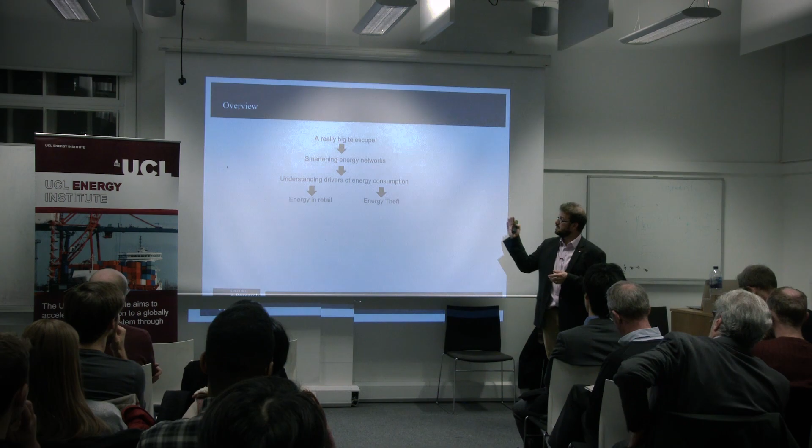Gaining insights on domestic and non-domestic energy utilisation through informatics, or how I link radio telescopes with energy theft. My aim today is to tell a bit of a story, to move from how we started doing work looking at radio telescopes, how you organise information for those, and how we then link that into smart energy networks, particularly at the distribution level. As part of that, how that linked into understanding drivers of energy consumption through analytics, and then looking at energy in a particular sector, in this case retail, but also energy theft. So, telescopes to theft, T to T as it were.

The radio telescope I'm going to talk about very briefly is the Square Kilometre Array, which some of you may have heard about. It's going to be the world's largest science experiment, covering thousands of kilometres, and is going to generate exabytes of data. The really important part of it is that it's going to be run by the radio astronomy community, and they have a few fairly fundamental requirements.

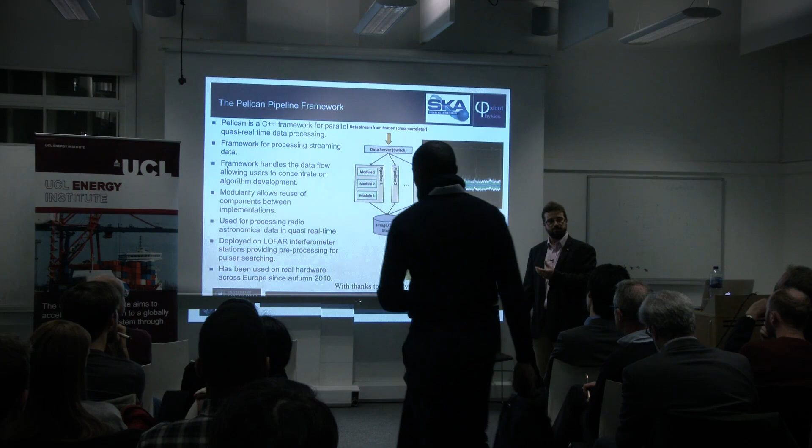From their point of view, what they want to be able to do is plug algorithms and applications that they develop into a common framework which interacts with the radio telescope, because they're not IT people, they're astronomers. They want a common framework which their applications can interact with, that controls the connection with data, that runs in the most appropriate manner on the computational resources as efficiently as possible.

As part of that, we developed this thing called the Pelican Pipeline. This was for the design study, around how we were going to get access to, or prove that we'd be able to build, a £600 million telescope and it would actually do what it was supposed to do.

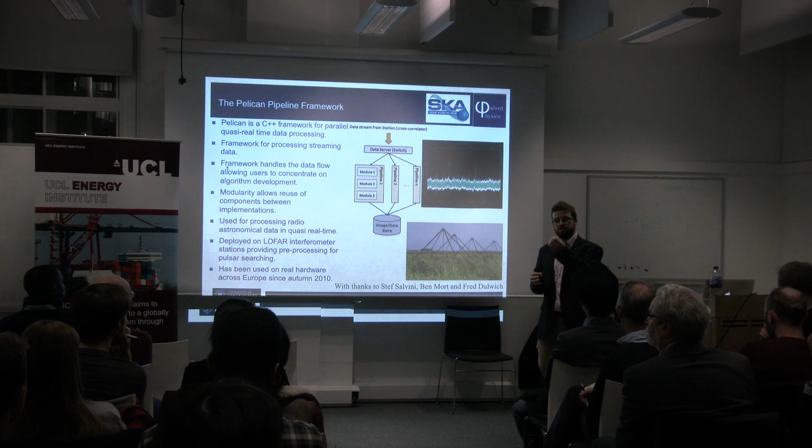The point of the e-research centre that Bob mentioned earlier, that I'm part of, is actually a particularly fundamental one. Our point is that we work with the research community, we build a tool or service, we look at the application design model of whatever it is that we're working with, and then we step back and say which other communities actually have a problem that is shaped like this.

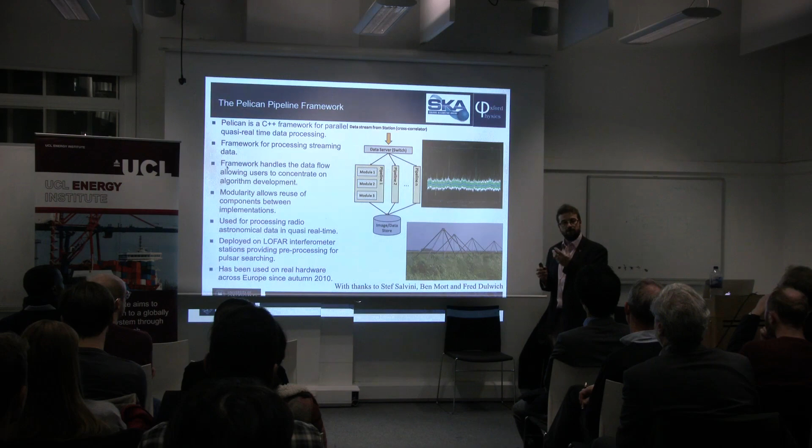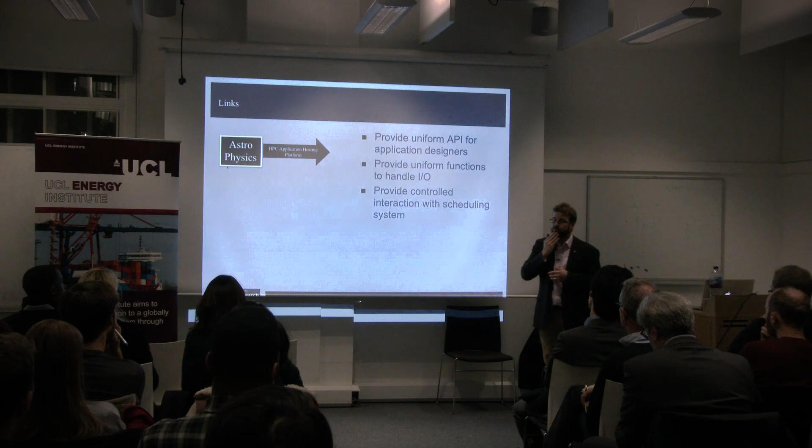So which community, if you were to ask them, has a problem very similar to this, where they want to be able to plug applications into a known framework and not have to worry about fundamental interactions with the underlying IT system. The really interesting one we came up with almost immediately was that we go from astrophysics, which wants uniform APIs for application designers, uniform functions for handling fundamental I/O, and wants to provide controlled interactions with the scheduling system and the compute platform.

What we found was that the distribution network operators are also getting to this point. For those of you in this room who understand this just as much as I do, the distribution network is the last not really smart part of the network. And though some of the DNOs would be very upset when you say their network isn't smart, it's certainly not instrumented and not analysed to anywhere near the level that the transmission network is.

The transmission network has a lot of applications. If you go to the National Grid Control Centre, they're very proud to show you all of the different services they're able to show, and understand exactly what's happening in the transmission network.

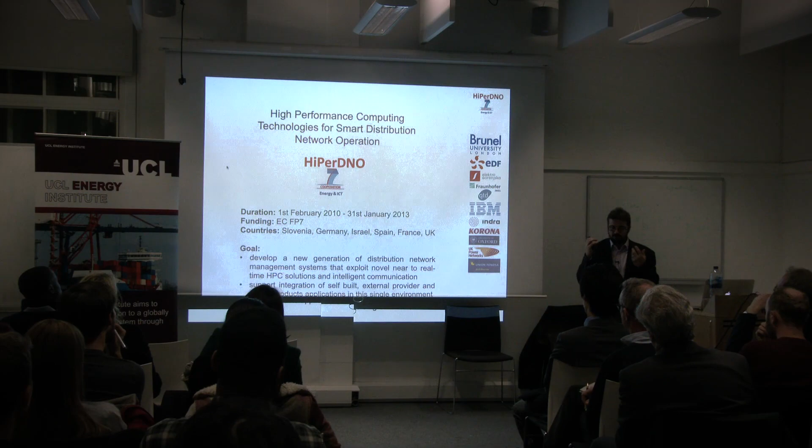As part of a European Community Framework 7 project, High Performance Computing Technologies for Smart Distribution Network Operation, we took the framework we designed for astrophysics towards a couple of distribution network operators from Europe, so EDF and Gas Natural Fenosa. The point here was that the network we're going to need within distribution is going to have to support plugging in of tools and services that have been designed elsewhere, maybe commercial products.

So they're not going to be something the DNO is able to look into themselves, they're going to be black box solutions, but they're going to want to run them all in a coherent way, connecting to the distribution management system that they actually operate. So of course, the big motivation is that here is our traditional system.

It's a very sort of generator to consumer type system, and we want to get to smart grids where everyone is connected and information is flowing. But of course, what we don't want to do is turn off the lights on the way, because that's always embarrassing and my mum would be really upset. From that point of view, we've got to smarten the systems in a way that is gradual and able to ensure we keep everything running.

So what we want to be able to do is take current distribution management and add smart technology to it without any interruption of supply, shall we say.

So what we came up with, utilising almost the technology from the astrophysics experiment, was the idea of application wrapping in a computation as a service environment. From that point of view, it was about the fact that different applications have different computational requirements. They have different precedence levels. They need to be run by different communities with different levels of urgency, shall we say.

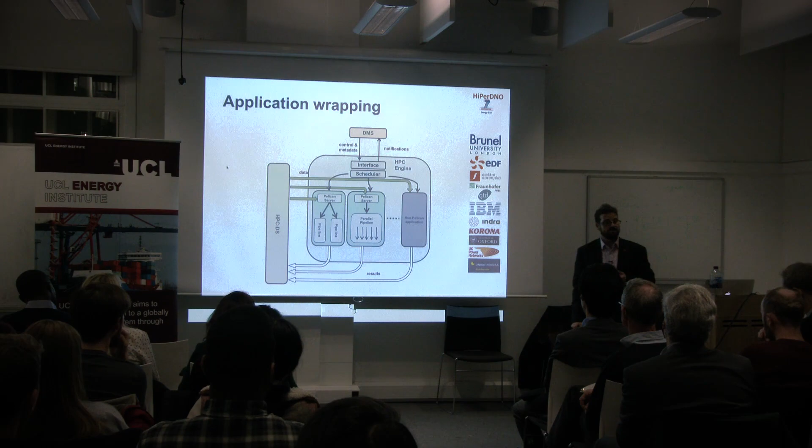And from that point of view, that needs to be controlled by the distribution network operator, by the guy in the control room. He doesn't need to know everything about this, but what he does need to know is that when there is an incident in the network and he requests a system state estimation and a restoration algorithm to run, it's going to run right there and then, because customer minutes lost means money as far as the distribution network operator is concerned.

So from their point of view, smarter distribution was really around four different key services. It was around a constantly available distribution system state estimation using available information that was within the system. It was about the idea of service restoration algorithms being able to run and preempt other services within the computational system. It was about condition monitoring and analytics of the network service.

So could you actually tell the condition of various network infrastructure using the various different streams of information that you had? And of course, voltage control, particularly in areas of networks with high amounts of distributed generation. The idea was essentially that all of these would operate as individual black box services within the high performance compute engine and storage operated by the distribution management system.

So at that point, it was the idea that we could plug all these in and create a smarter distribution network without turning the lights off, and have the ability to add new and better services as and when they came online.

But the most important part in some ways is about this reuse idea. The energy distribution guys, as part of that, we developed computation as a service. With the condition monitoring, we talked about developing computational services to support data mining and machine learning for condition monitoring.

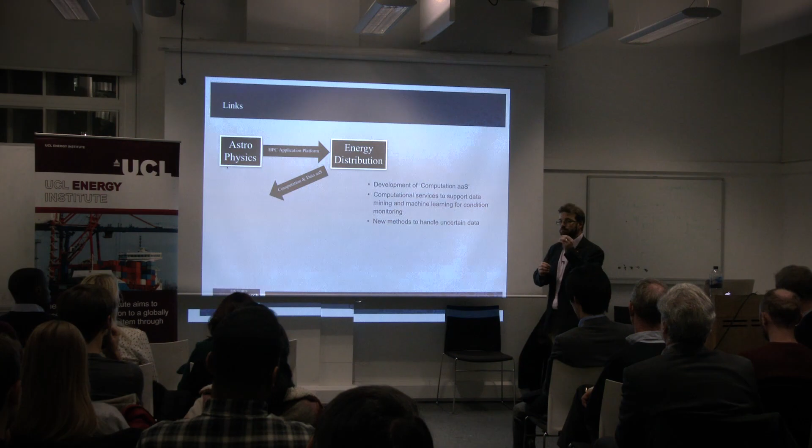Now, from the point of view of the energy network and very large rollouts of IT infrastructure, for example smart meter rollouts, when you're talking about tens of millions, you're not going to be able to guarantee how well every single one is behaving. And from that point of view, you want to be able to do certain types of machine learning and algorithmic services knowing that you can handle the uncertainty in the information that you're going to generate.

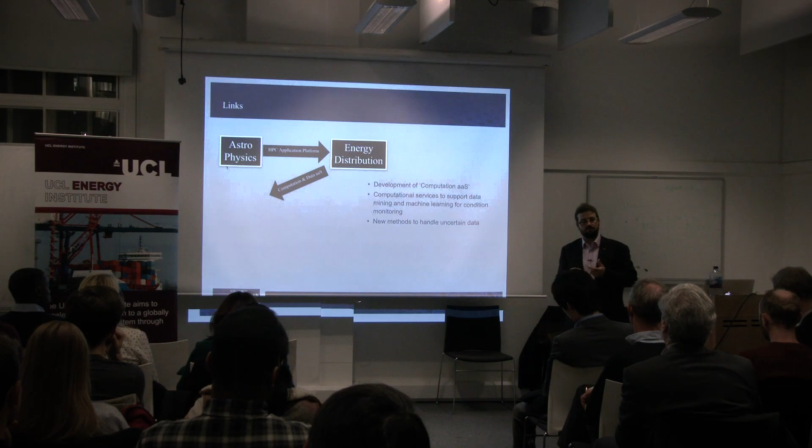So following on from that, we then went into our next activity, which was the Adept Project, which was an EPSRC activity in collaboration with Brunel. This was looking much more at the domestic area. The idea here was three key things.

The first one, looking at tariffs and pricing, is thinking about how consumers are really ready, willing and able to understand dynamic tariffs or complex time of use tariffs.

So who can remember when mobile phones were introduced? Can you remember peak time and off-peak time in your mobile phone? When you then got past simple peak and off-peak, how many different types of peak time were there? Because the really interesting one, at the very height for mobile phones, there were 180 different tariffs, pretty much from Vodafone.

And you can tell immediately what happened there. Everyone ignored it and just used their phone, which is why most people now have a flat tariff. You pay for your phone and that's it.

That's the thing you want to avoid when introducing dynamic pricing and time-of-use pricing within smart metering: confusing people, like my mother, to such an extent that she says 'I don't really care, it's only 20p, so I'm going to ignore putting on the tumble dryer at this time because it doesn't matter to me.' That's going to be a failure of the introduction of these tariffs, and of all the infrastructure we've just spent a lot of money, time and energy, ironically, to introduce smart metering.

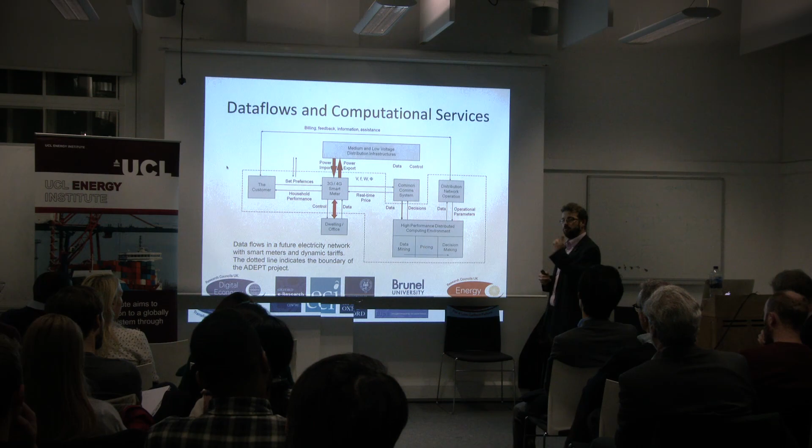And really, can we say to people that if we introduce real-time pricing, you're going to be a winner? Because if you introduce any sort of tariff change and turn around to people saying you're guaranteed to pay 50 pence a day more, they're probably not going to like it and probably not going to want to adopt it. So this was very much about what we could find out from the information.

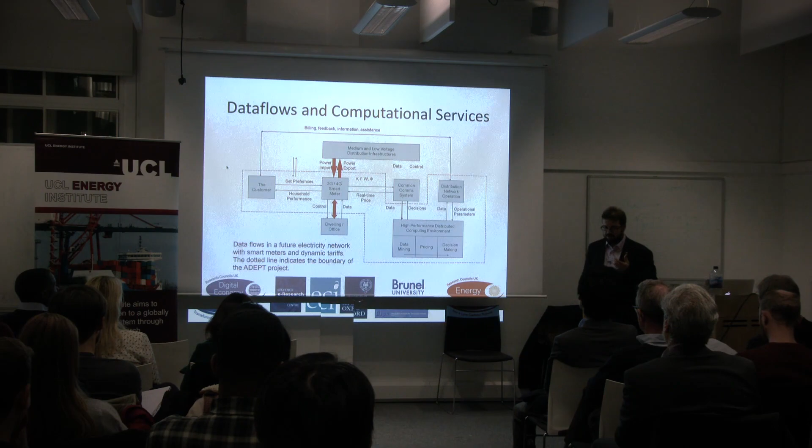From the point of view of data mining, it's around categorizing and classifying costs. We were lucky to have, fairly new at the time, a data set available to us: the DEHEMS project, an EC FP7 activity, which had about 250 properties in the UK and Bulgaria with smart meters installed to provide domestic load information.

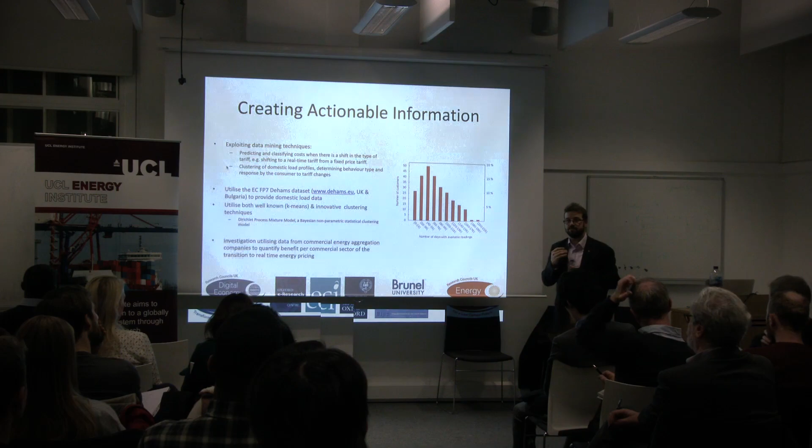On top of this, and this was a real extension of the project, we also managed to get a handle on a load of commercial data from a local energy aggregation company called Opus Energy, who are based just up the road from me in Oxford. From that, it was looking at the idea of how we measure the benefit of switching tariffs. So this was the result of the clustering using DPMM on our domestic or residential data.

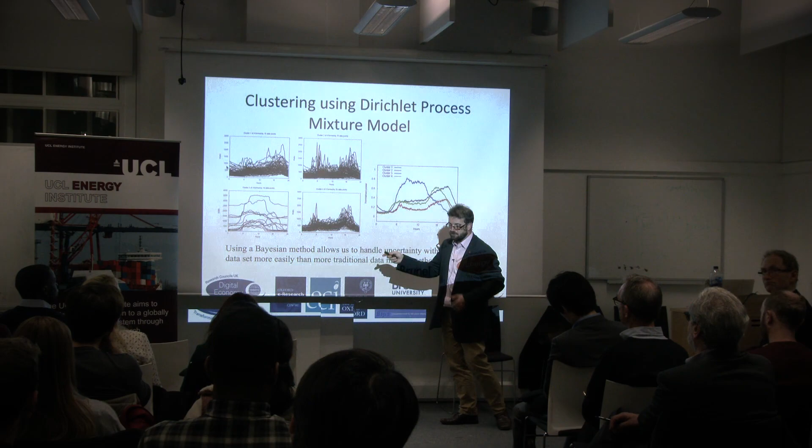And it came out every time consistently with 4 different clusters. They look very sort of raggedy when you look at them just implanted on top of each other. We'll come back to these later because they're really interesting, bearing in mind it's domestic.

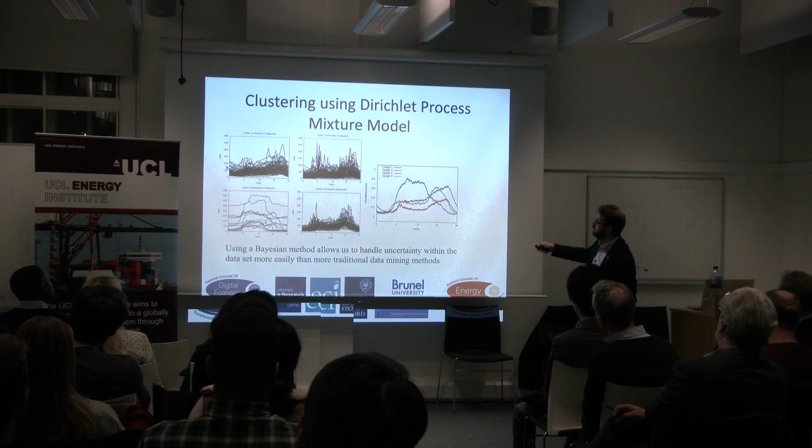But this is the plot of the centroid, the load profile of the centroid for each of the clusters. The interesting part here is you can see very clearly, here's our fairly standard domestic load curve. We've got some users that are pretty large evening customers. We've got these ones that are pretty flat. And then we've got these guys that give a very, very different curve, which now, having operated in a different area, I recognize immediately, and some of you obviously will as well.

But what we were able to say was, okay, the consistent point around this was no matter how much we adjusted the clustering, these clusters came out pretty much every time. We then started to look at what does that actually mean if we were trying to do demand management and things like that? What would that mean for elasticity?

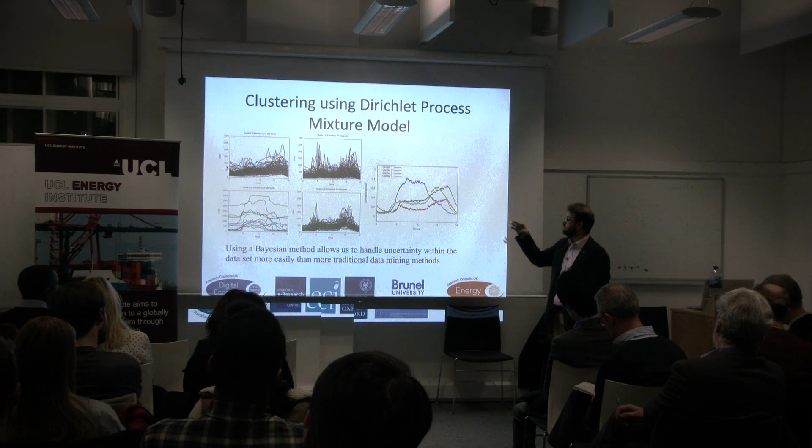That allowed us, through the work of Sarah Darby within the project, to run a couple of focus groups with the different communities to talk about how they would react to some of the points on different tariffs.

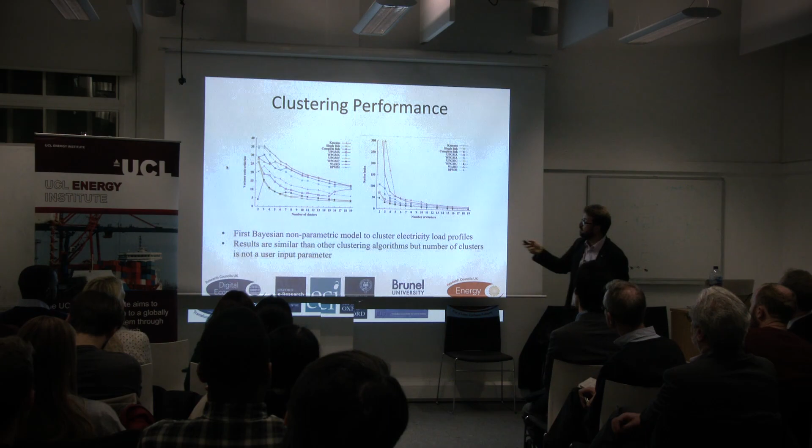From the point of view of performance of the clustering, we basically saw that DPMM, using a couple of fairly standard clustering measures - the variance ratio and the scatter index - works basically almost as well as any of the other standard clustering techniques, right up to a fairly large number of clusters. So we were fairly pleased with that.

So from that point of view, it meant that at the end of the day this was a technique that would have value when attached or utilised with domestic load consumption data, and could be used as input into a number of other activities.

The other thing we looked at, which there's been a lot of discussion about, is that the DEHEMS dataset came with a 6-second resolution, so it was a pretty big dataset. And of course, it's very, very dissimilar to what we're likely to get from any smart meter rollout, or certainly what people are utilising in smart meters on a large scale at the moment.

So what we did was create a number of different sets of data by aggregating our 6-second data. We made 1 minute, 4 minute, 15 minute, 30 minute, 60 minute, and 120 minute resolution sets of data, and then looked at the different sets of measures of cluster performance that you can get for each of those.

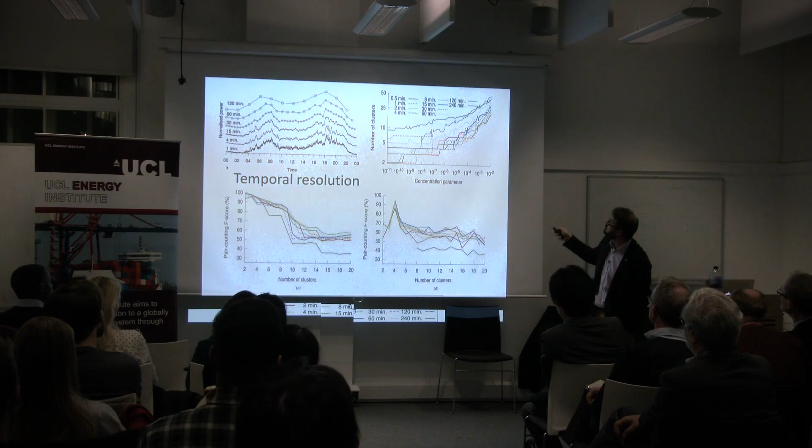The point is that anything over 4-minute resolution becomes very difficult to pick out the same number of clusters in the information you have, compared to what we'd seen previously in the very high resolution data. The clusters start to disaggregate themselves. An important point is that if you're going to use this data for other activities, the resolution of the data will greatly impact your ability to do classification and similar tasks.

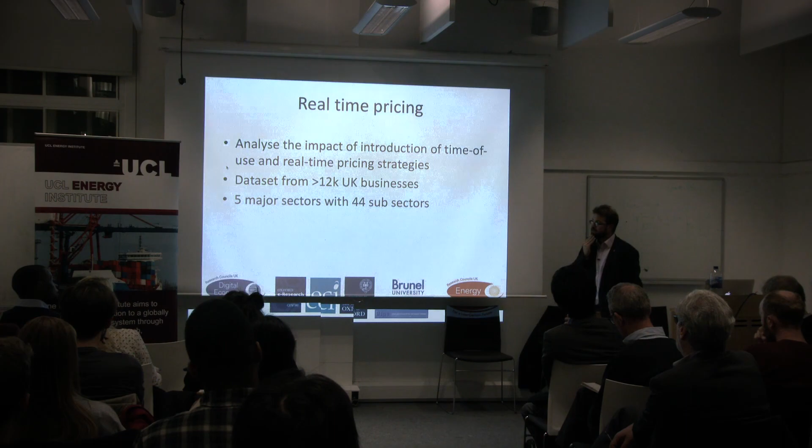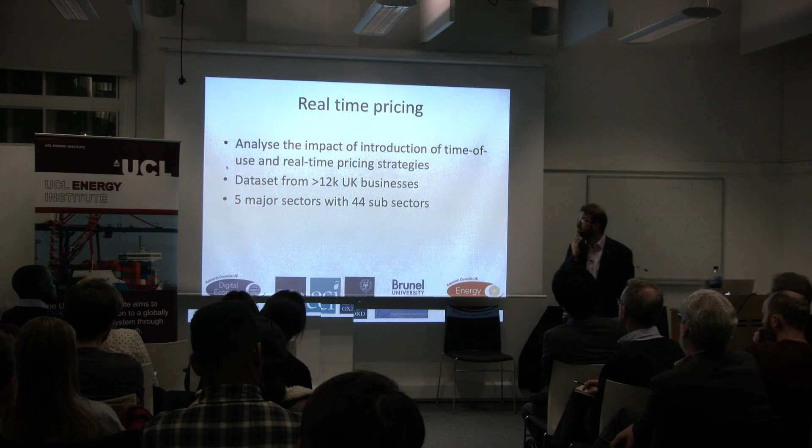The next part is around real-time pricing. Can we actually assess the impact of introducing real-time pricing? We had 12,000 UK businesses' data, and the major thing here was we kept them in their major sectors even though they were subdivided, because if you subdivide into 44 sectors from 12,000 businesses, some sectors end up with very little in them and become very difficult to work with.

These were the tariffs we used: a fixed price tariff, a fairly standard time-of-use tariff from Northern Ireland Electricity, and the real-time tariff, based on the average wholesale price of energy for the same period. We had 5 different major sector areas: entertainment, industrial, retail, social, and other. Many people wanted to investigate the social sector, which was pubs, clubs, and restaurants, but not many wanted to investigate the industrial sectors.

But the point is, if you were to apply each of these profiles to each of these different tariffs - bearing in mind these are the centroids and there are variants within those clusters - who benefits, who wins, and who loses from the migration from one tariff type to another?

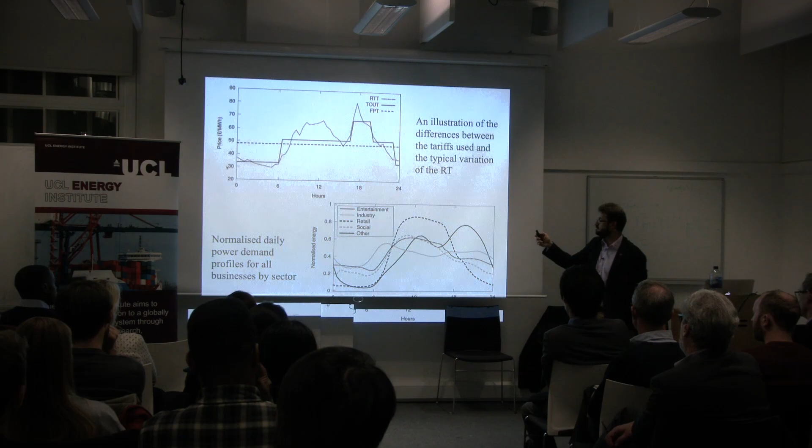As an example, we looked at the transition from fixed price to real-time price. We picked out two different groups: the entertainment sector and the retail sector, and highlighted the centroids of all the winners and losers within those groups. A winner is someone whose bill decreases when they transition from one tariff type to another; the loser is the opposite.

If we look at the black line - the winners have lowered their usage at the centre of the day. The entertainment winners increased their utilization outside of peak times and decreased it during peak. We've seen that those with a much more balanced lunchtime and evening load are actually the losers in this scenario.

The interesting and important point is that in some cases there is very, very little difference. From a price elasticity or behavioral elasticity point of view, if you're able to change your behavior within the entertainment sector - thinking about how you use energy in the morning versus lunchtime - it involves very small numbers of transitions and very small differences.

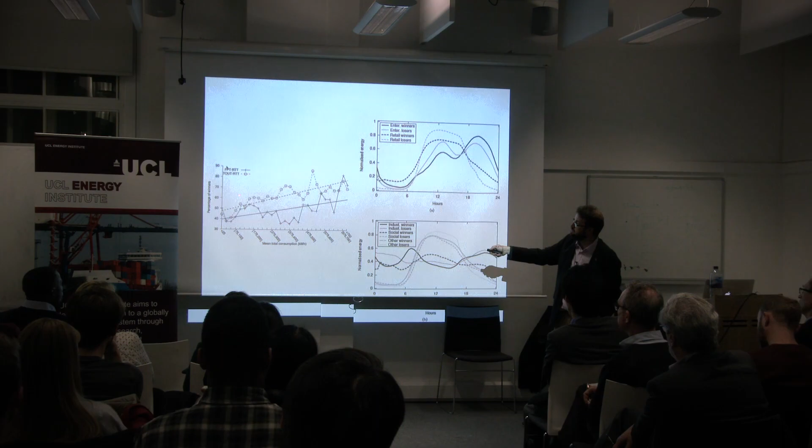As we see on the graph on the left-hand side, the solid line is the transition from fixed price tariff to real-time tariff, and the dotted line with circles is from time-of-use to the real-time tariff.

What we look at here is mean total consumption for the particular business and the percentage of winners averaged over the whole data set. It shows that the larger the consumption, the more winners, essentially. That's an interesting point, across all of the different sectors we're working with, averaged across the whole data set.

But what it actually shows is that there's a lot of spikiness, in terms of the different sectors contributing at different points in this curve. There are some very seriously large users within this area up at this end, mostly coming from the industrial sector.

But the interesting point, and this was something we went back to the colleagues at Opus Energy for, is that having this information allows you to effectively think about a new business. It allows you to say, with my knowledge of what are the ways you want to be shaping your energy consumption to work better when making one of these tariff transitions, I would be able to go to a consuming business they're already working with from aggregation and say, if you were to make this transition from this particular tariff to this particular tariff, then we can show that you're actually going to do better.

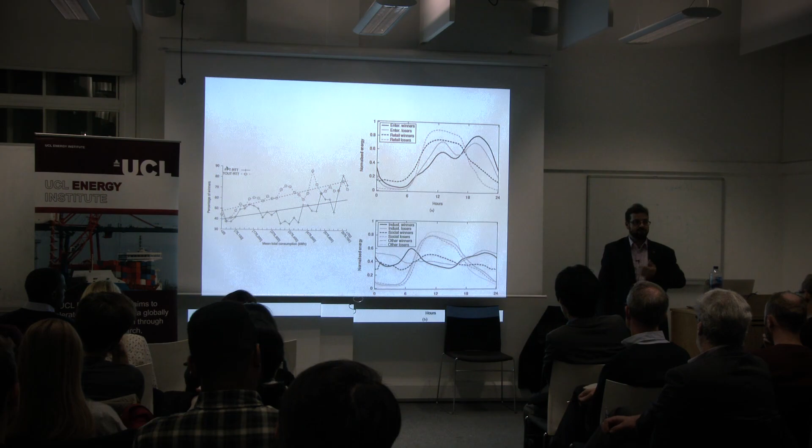So this is around saying that this is a new service that people like energy aggregation companies and retailers can be thinking about, backed up by strong analytics that actually validate this as it's being done.

So from our point of view of our linkage, we had our energy system data there, our machine learning and analytics, where we're gaining understanding of drivers of energy consumption within domestic and commercial customers.

Following on from that was a project with a fantastic title of Working with Infrastructure, Creation of Knowledge, Energy Strategy Development. I have to thank Katy Janda in the Environmental Change Institute for this one. Or WICKED, which was looking at energy utilisation within the retail sector. We did manage to get a very substantial number of commercial partners within this.

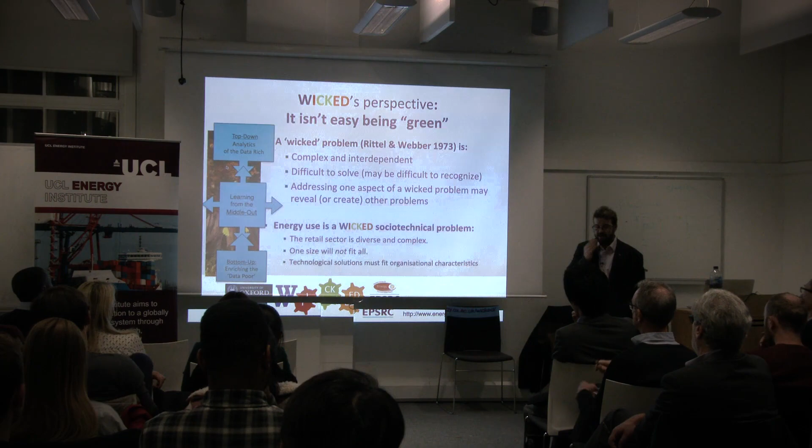Now, WICKED is an idea that energy consumption and energy utilisation is a problem that's multifaceted, interconnected, and one that has no simple solutions. From the community we're working with, we have multiple different communities participating - we have the B&Qs, the John Lewises, right the way down to the small corner shop within everyone's street. They're still retailers, still essentially the same group, and very much dealt with in similar ways by industrial strategies and regulation.

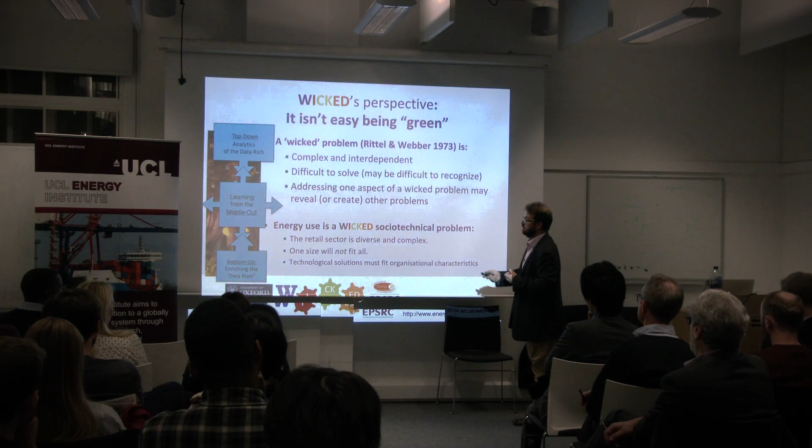So what we were trying to say is there are three different communities. The top down, the analytics of the data rich - these are guys like the B&Q, the Argos, the Sainsbury's, the M&S. All of these guys are working with energy managers. There might be only one energy manager per group, or if they're lucky, more than that. But these guys have access to data, very often on a regular basis. So there's a lot of capacity there for learning from working with them to increase their understanding of their own data.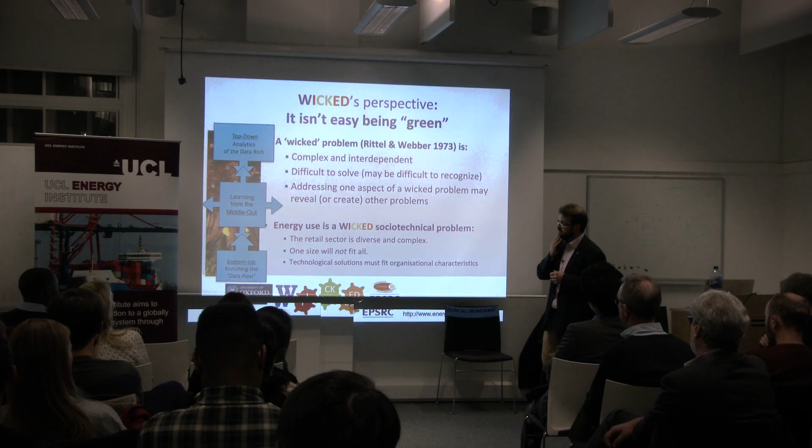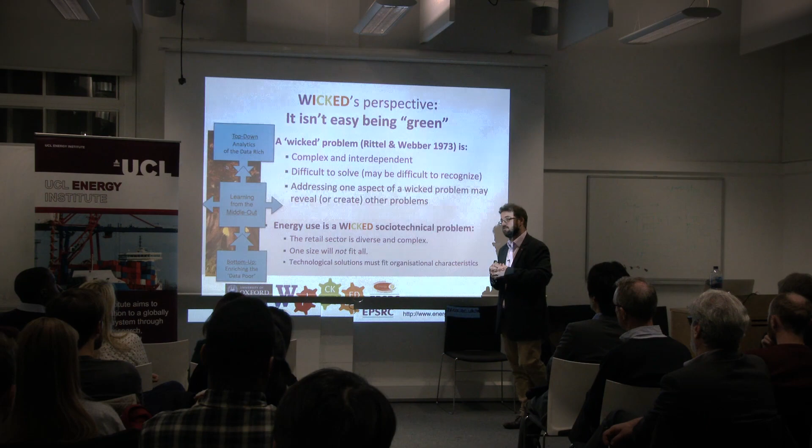Right the way down to the guys at the bottom who have no data, because they're renting their shop from a landlord. They don't have access to the meter. They have no understanding of what energy they're consuming, and no understanding of how their business practice connects with their energy consumption and utilisation.

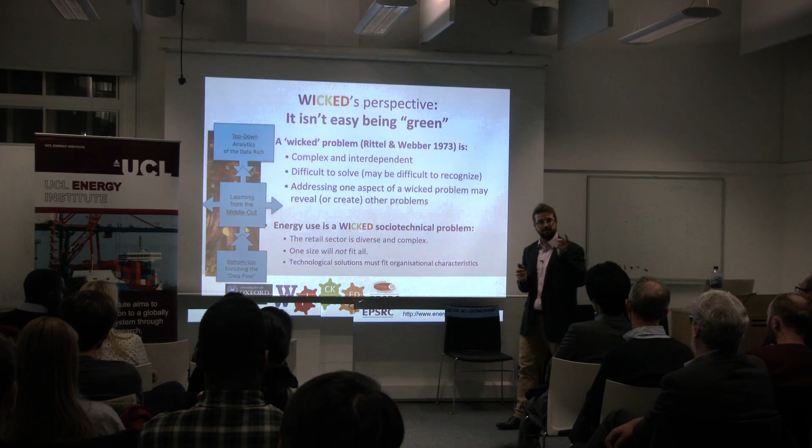That was the group within ECI thinking about how you actually create a smart meter for them that doesn't cost the earth, but is something they can get for under £10. Russ Layberry in ECI has basically built a smart meter you can get for under £10 that you can just hook up to your system. The data rich - these are the guys who really do know what they're doing.

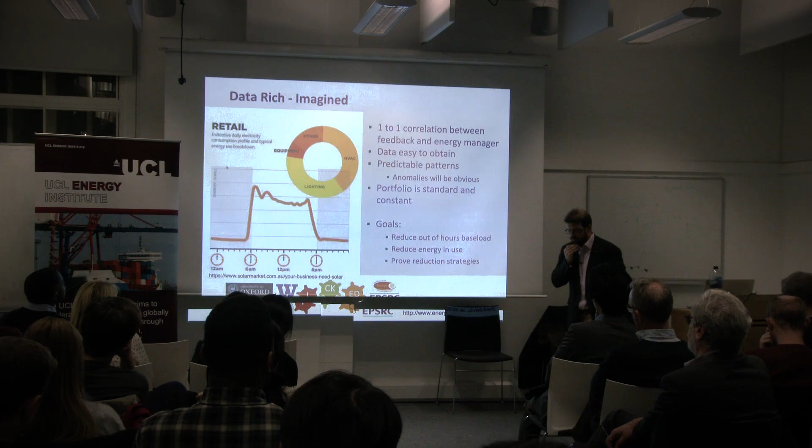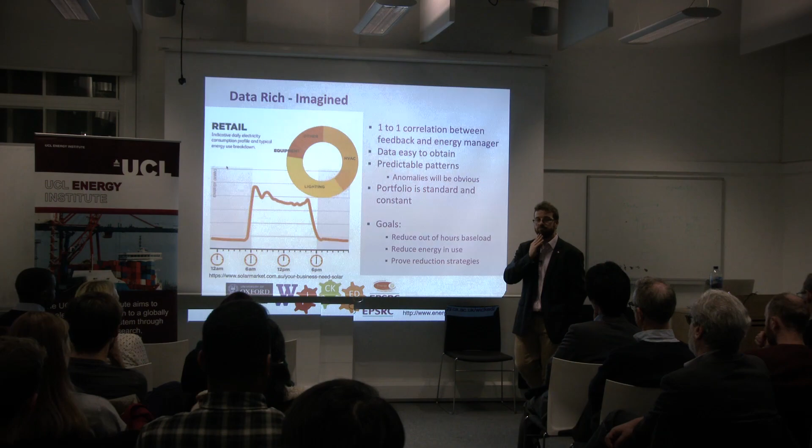They have staff on board engaged in this. But interestingly enough, one of the things we found is these guys are still retailers—people focused on how much product gets out the door. That means return on investment times matter a lot. We found at least one major national chain that requires 100% return on investment on any energy efficiency work within 1 year.

So there was a gentleman, the energy manager in that chain, who felt very under pressure whenever anybody asked whether he'd pay back the money it cost to do X, Y, or Z. A lot of LED lighting went in, and that was sort of the way forward.

One of the things we wanted to look at, with a large electronics retailer, was: from his point of view, what can we get simply from the information he has access to day-to-day? Can we figure out what we can do to help him out?

The interesting thing is he has 30-minute electricity readings, because that's what every smart meter has at the moment, but very little metadata went with it. He had the postcode of the shop, which he could get easily, but very little knowledge within the company of how to get information on the type of building the shop was actually located in.

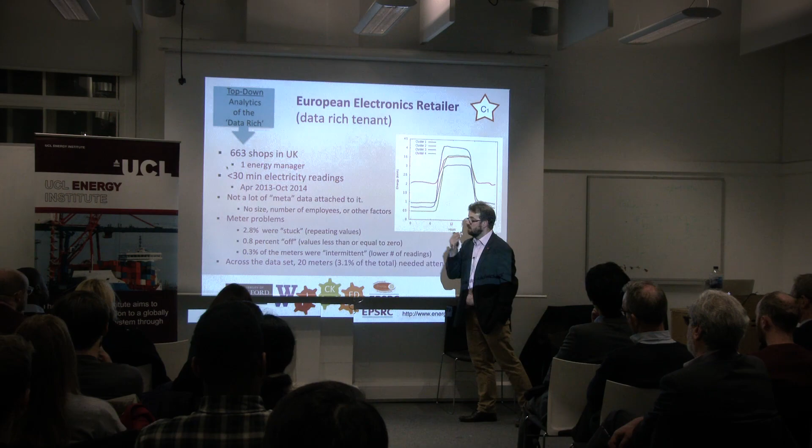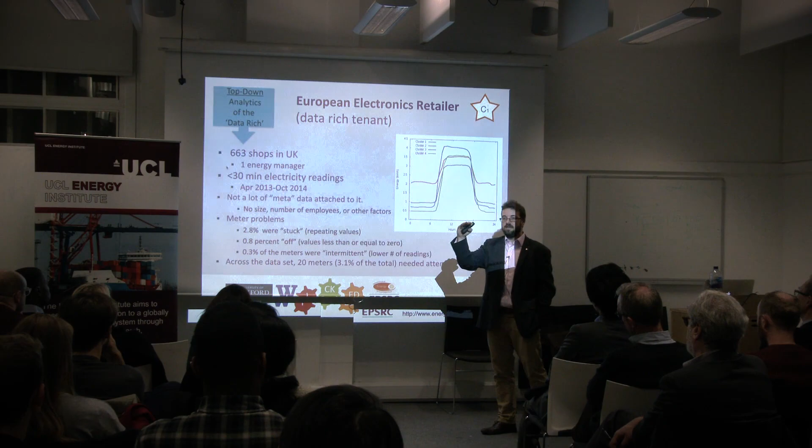One of the things we were able to do almost immediately was identify meter problems. We found about 3% of his meters were broken and just giving constant values. The interesting part is we're not talking about constant maximal or minimal values—we're talking about constant values within a sort of expected range of consumption, which makes it very tricky for any other system to flag unless you're specifically looking for it.

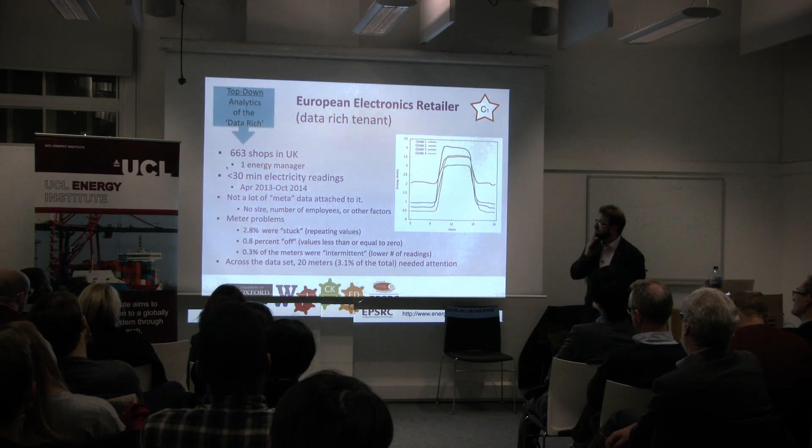We also had about 1%, and 0.3% of meters with intermittent failures—they give good data for a long time, then rubbish for a short period. So there's a non-trivial number of meters that actually needed attention.

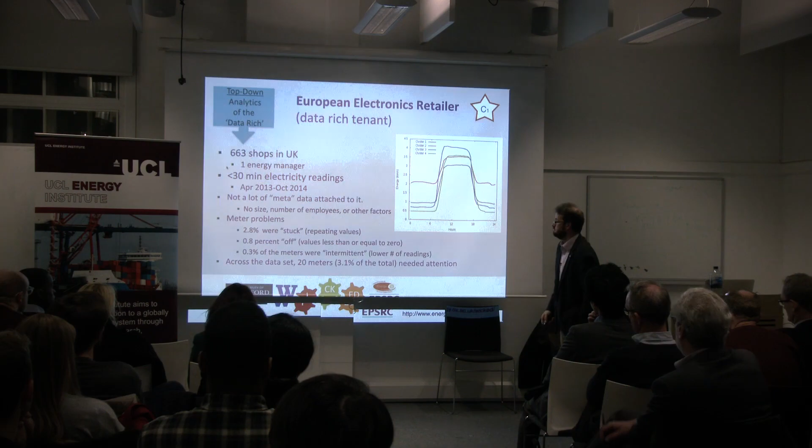That was a value-add as far as he was concerned, because he could go back, in many cases, to the landlords of the premises and say, guys, you own the meters, I want you to sort this out. So that was the first step.

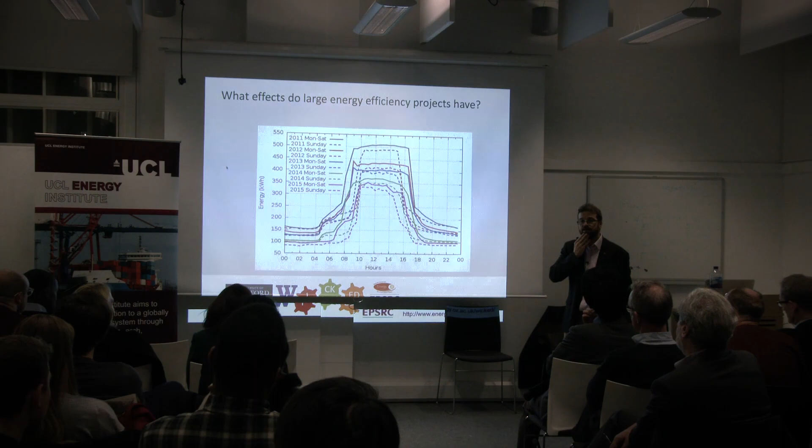The next question was: what sort of effects do large energy efficiency projects have? This was easy to examine with another retailer, looking at the same population of shops to see whether there's a constant decrease and real benefits from the energy efficiency projects they've been working on over the years.

Since they're retailers with store opening hours, the ratio of store open to store closed is quite handy in many cases. Also, where do they sit in terms of total consumption from different store types, in quartiles of consumption, comparing floor area across different types of stores?

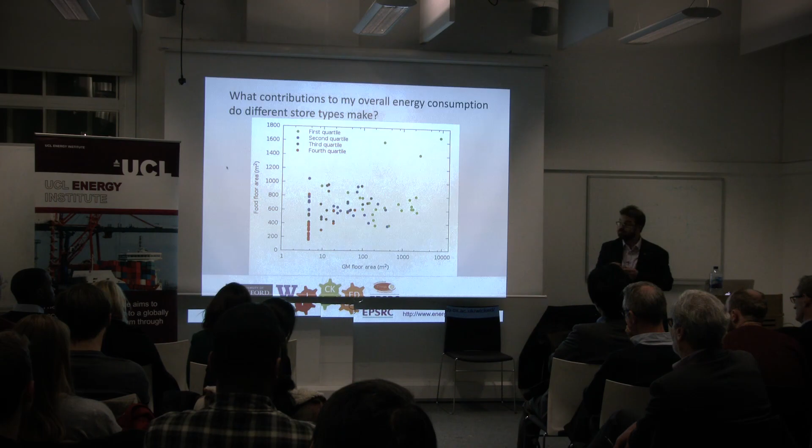But the really interesting part, which the managers were really getting into, was the idea of: where are my best stores? Where are my worst stores? How do I understand where best practice is? Because in some ways many of these stores operate with a level of autonomy, so where do you concentrate investment?

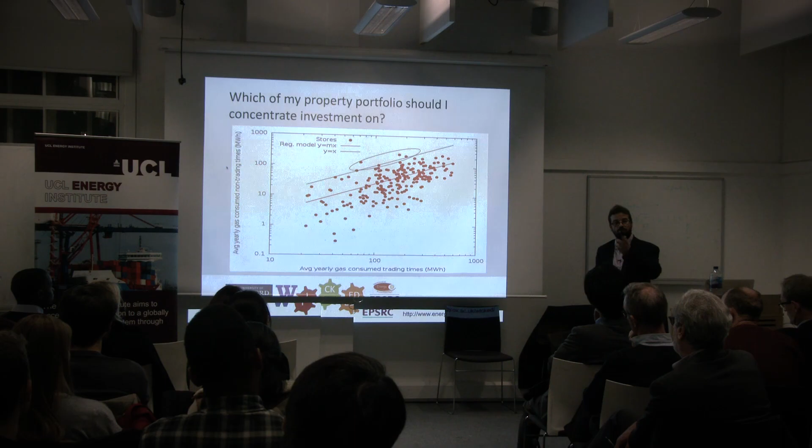So these stores up here are doing very badly. As the group energy manager, I want to go in and say, what's particularly bad about these? Do you have some sort of problem or issue we need to work with your landlord on to really solve?

And of course, where do I want to go and send all the other guys from all the other shops, to go and learn from these guys, because they really know what they're talking about?

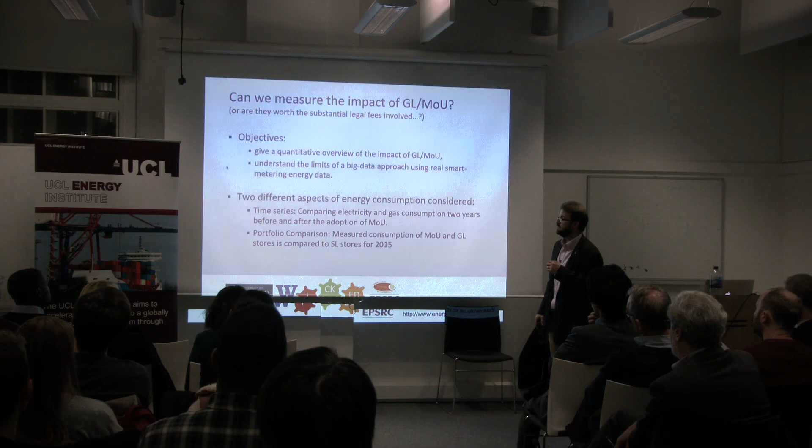The other part of this activity within the project was working with the law department around the idea of environmentally friendly legal instruments—green leases or memorandums of understanding, which establish a partnership between the landlord and tenant. Really what we wanted to say was, were they worth the legal fees it takes to establish them? Because legal fees are vast.

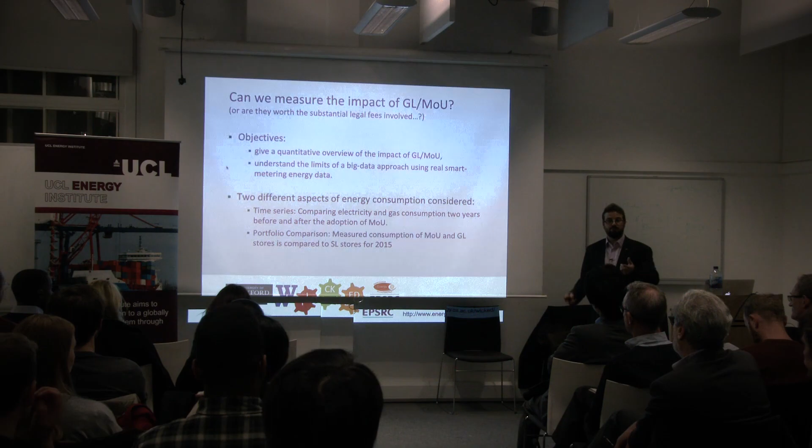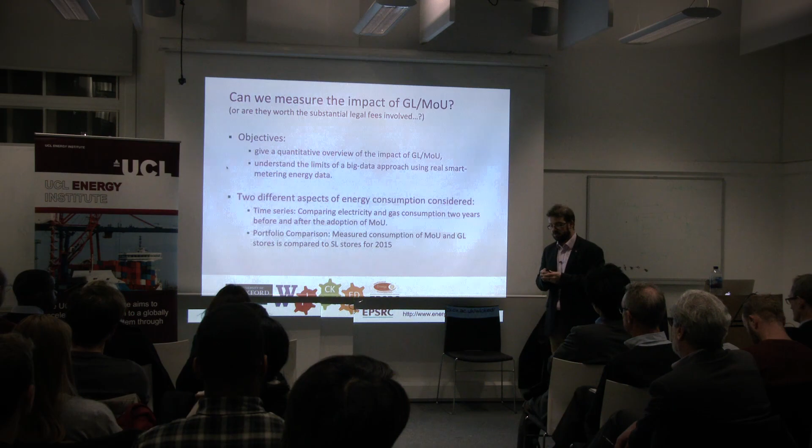From that point of view, we really wanted to look at whether we could see a quantitative benefit to the establishment of these. And I must admit we struggled, for two reasons.

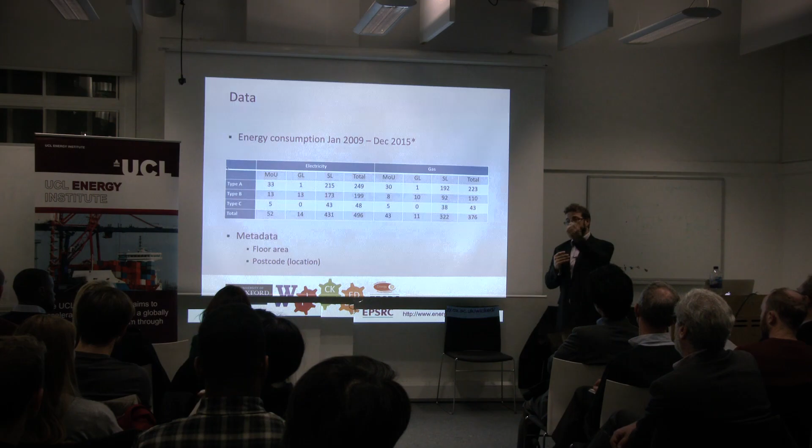The first was that we had energy consumption information, metadata on floor area and postcode, but even the group themselves didn't really know when exactly these particular legal instruments came into force. So what they said was, well, say they're all after March 2013, and we had to deal with that as the date.

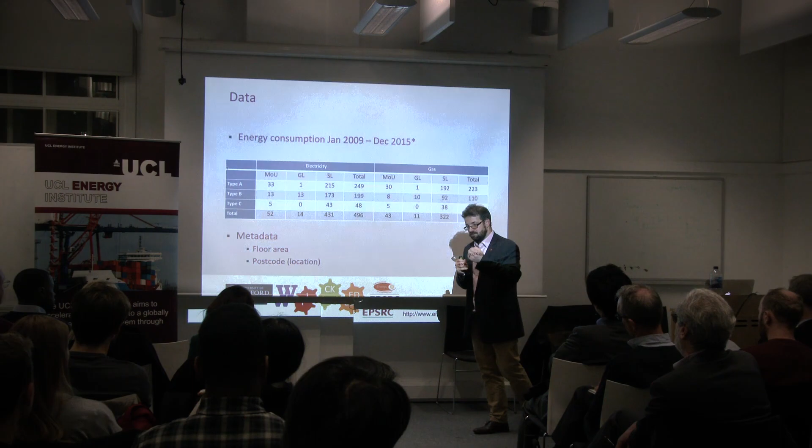Now, the other problem with this is that all these instruments do is say, okay, we will work together. It doesn't mean the day they're signed you're going to rip out the heating system and install a new energy efficient one. It says we've agreed we're going to work together in future in a close and collaborative way.

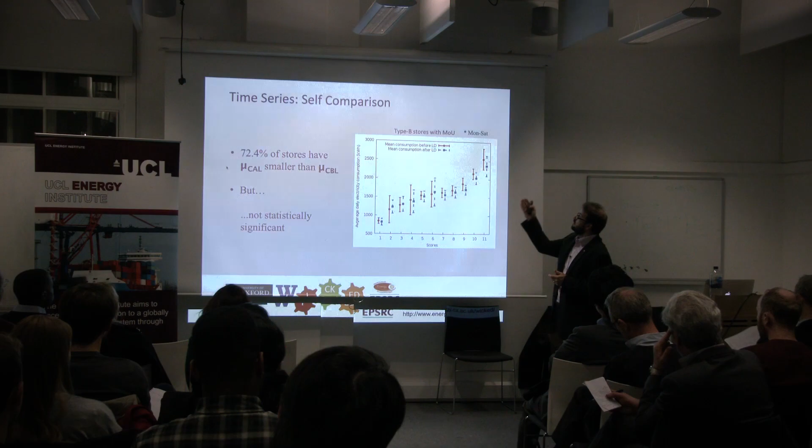So we looked at a bit of self-comparison, looking before and after. You can see there's a significant percentage of stores where consumption after the LI is smaller than consumption before, but unfortunately it's not really statistically significant.

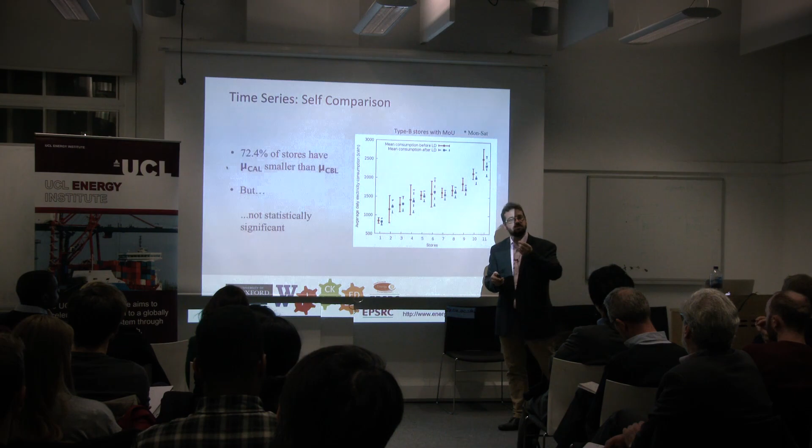But it's there, and one of the things from interacting with the legal teams was that this still came out as important for us to know—that there's something, even if it's not statistically significant, that we can start having conversations with people about.

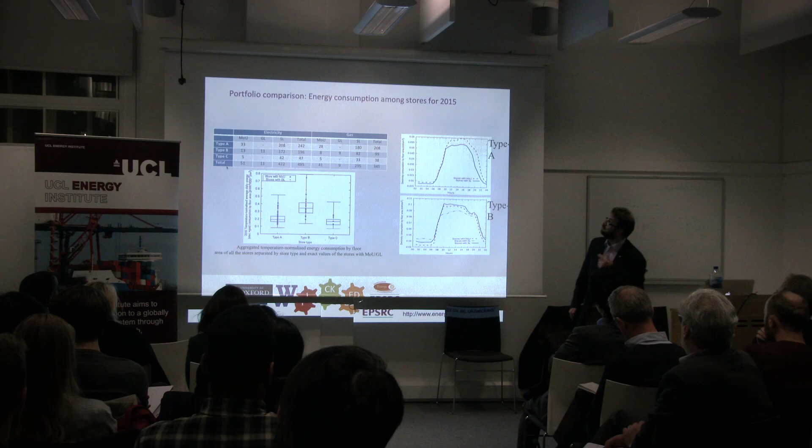What I'm going to do is say, okay, from this point of view, we linked consumption and non-consumption time series providing analytics. We've linked consumption to business process within Wicked. Now, of course, data mining, data mashing—we're going back to these guys here.

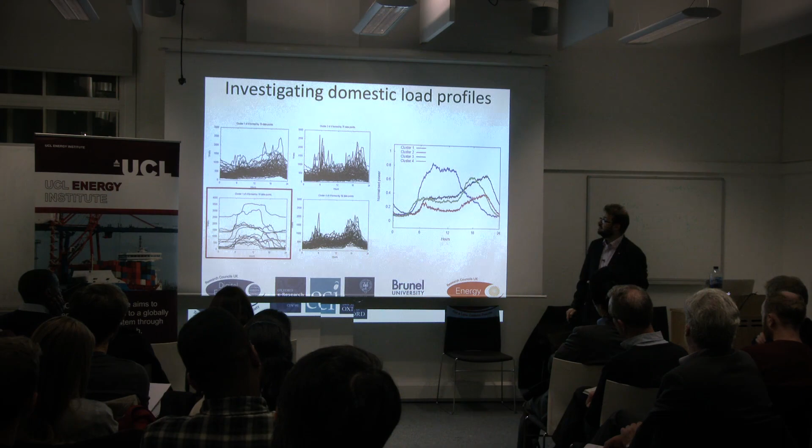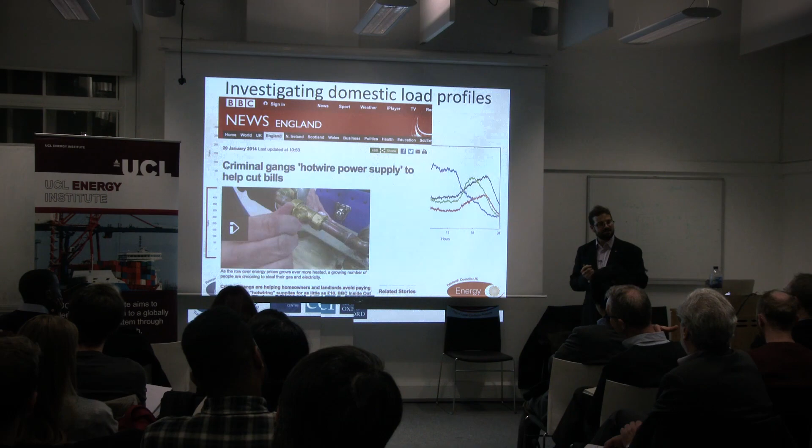It just so happened that on one of the days I was putting together a presentation on this project, the BBC had an excellent story about criminal gangs hot-wiring power supplies to help cut bills. I thought, ooh, that's quite interesting. It turns out for fifty quid, if you go on the dark web, someone will come along and fix your meter. I thought, that's quite interesting.

So I went to go and talk, and British Gas came to talk to us, and we ended up getting a project on Data Insights Against Energy Theft. Before we'd started that conversation, I thought, well, that's interesting—British Gas had 250,000 smart meters that they currently run, and 250,000 smart meters in the commercial space. I thought, I can't imagine there's that much theft going on.

So energy theft costs the UK about 400 million a year, which means you're paying an extra between £7 and £20 a year on your energy bill—every single one of you—because of it.

The interesting part is it's very often accompanied by other criminal enterprise. We've all seen the infrared of very hot buildings, shall we say. But more importantly, an awful lot of it involves meter tampering, and that is a health and safety hazard—look at this. Who on earth thought that was a good idea?

Now, that can be lethal. And the really interesting part, though, is at the moment, meter theft requires somebody to go and visit the building.

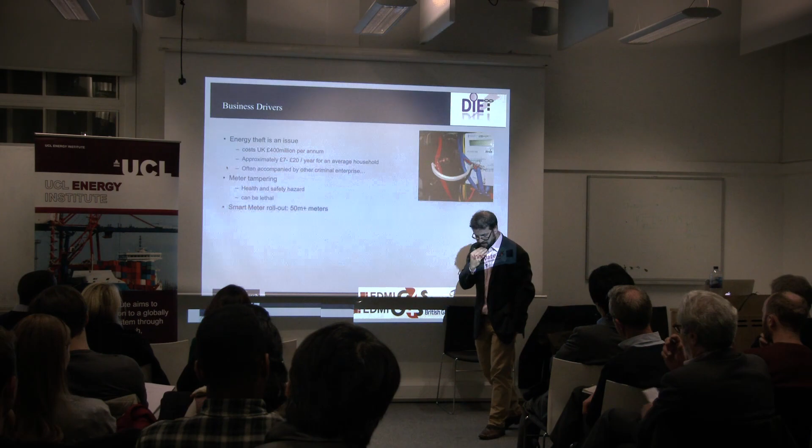So when we started this project, we went to the first kick-off meeting and I asked, have you got some cases of energy theft? That was after they told me they were dealing in the commercial space, and I was being naive, thinking it'd be one or two. He said, yeah, here's a spreadsheet of 200 from the last 2 years. I thought, okay, quite a bit then.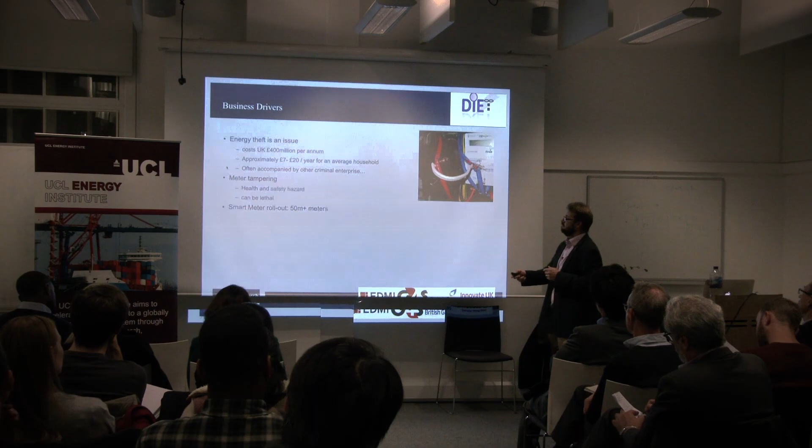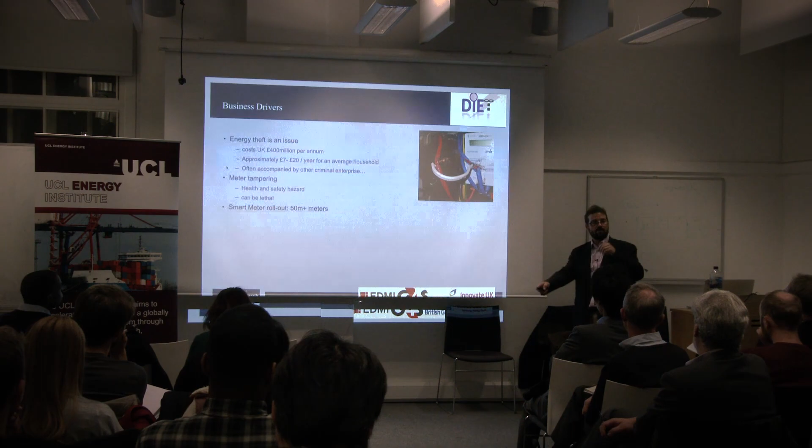So from that point of view, it's like, how do we think about doing this? How can we actually think about utilising data generated by the meters to identify energy theft? Now, there have been an awful lot of projects thinking about how you look at consumption data to identify theft, losses, whatever.

So from the point of view of the data that we had, their portfolio of meters - in the end, it ended up that we were allowed to basically get all of their commercial smart meter data, which was quite interesting, and did highlight a couple of interesting problems in data collection.

We wanted to make sure that data was regularly arriving and had fairly high quality, which meant we had to do a lot of cleaning, and a lot of going back and talking to the people actually providing the data. Because the other thing here is the meter operator is very often not the retailer.

And I'd never realised this - within our project we had EDMI, the smart meter manufacturer, who operated the head-end system which communicates with all the EDMI meters out there. We had G4S, who became Morrison Data Services, the meter operators for British Gas, who interact with the head-end system from EDMI, who then pass the consumption data on to British Gas. So you've already got 3 actors in a data chain.

Now the other part, and the innovative part I'd say with this project, is we weren't just looking at consumption data. Smart meters actually generate a whole load of event data as logging information that is basically completely ignored as it stands at the moment. There's been an awful lot of work on standardization of consumption information between different smart meter manufacturers, but basically no work on standardization of non-consumption data streams that these smart meters generate.

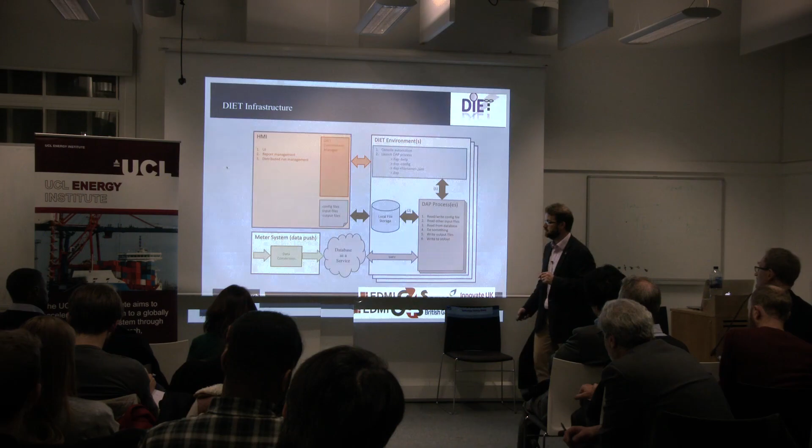So the system we've ended up building involves the meter system, essentially the EDMI head-end system, pushing 2 streams of information - consumption and non-consumption - into a very large MongoDB service. This then runs a whole load of analytics, which I'll tell you about in a moment, to essentially give you a list of meter points which have a higher indicator of anomaly.

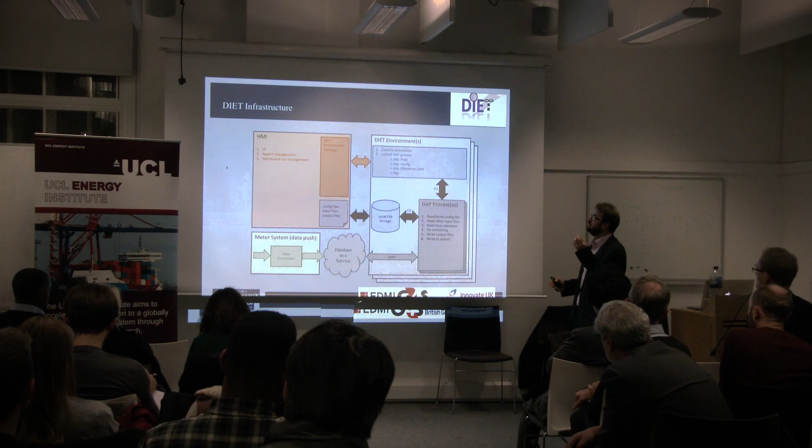The data that we get - and we're doing this in a slightly different way - so from the consumption information we're taking average daily data. We're not going into all the individual load profiles, just average daily data for each of the meter points. So the data comes in 2 parts: consumption data, and event data.

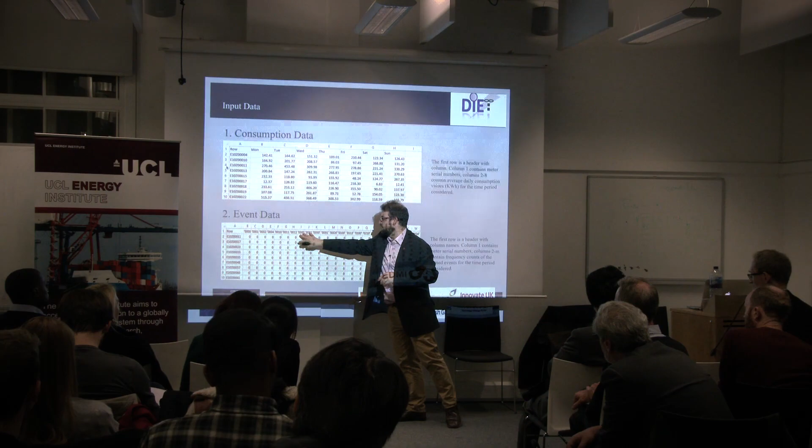The important thing here is these represent individual meter error codes as generated by EDMI meters, which does, as you can imagine, have a bit of an issue if you want to generalize this and connect to Siemens meters, because their codes won't be the same. So one of the pushbacks to the meter manufacturers is that we need to think about standardizing this. So we take the 2 streams of data.

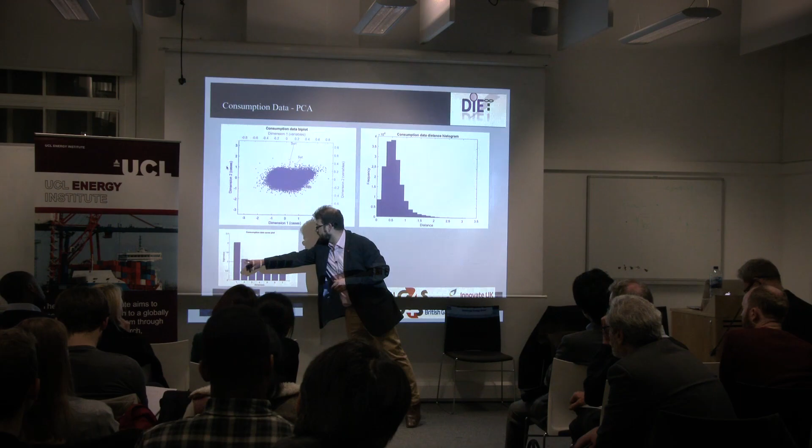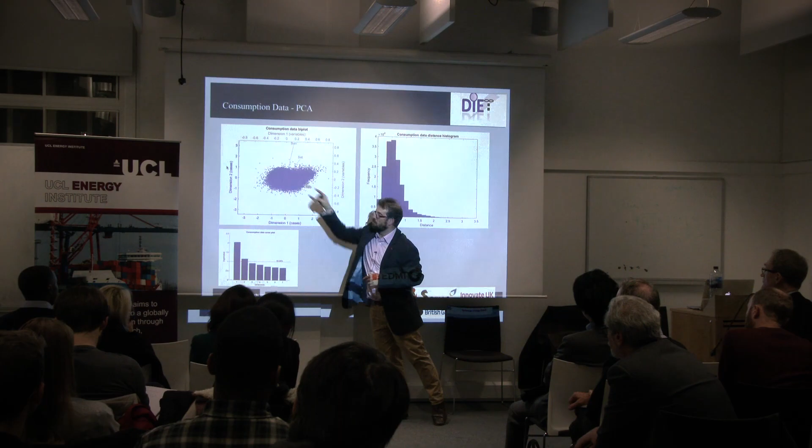The first one, on the consumption data, we do a PCA analysis. From the point of view of the stopping rule, we take the first 2 principal components, plot it into the biplot, then measure the distance of each point from the center, and do a rank ordering of the consumption data and the consumption meter points.

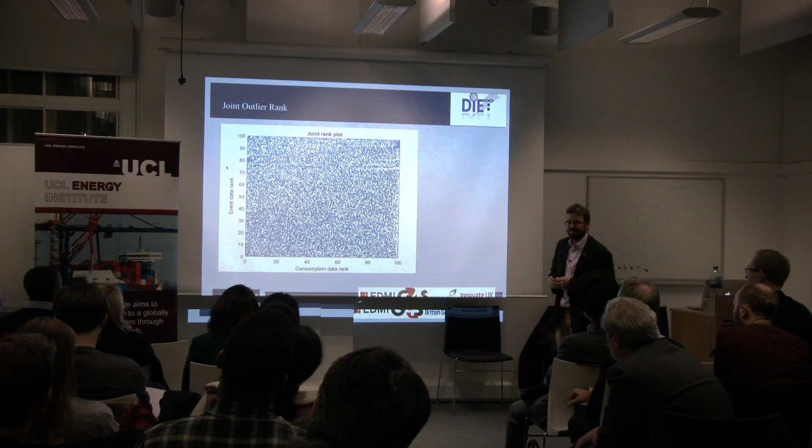From the point of view of the event data, we do a correspondence analysis, then do exactly the same rank ordering based on distance from the center. Then we plot them as a joint rank - this is the point with all the different points of the data. The important point here is we then take this joint outlier rank, as we call it, and do a density - we look at the number of points within different areas.

And you'll start to see a feature emerging.

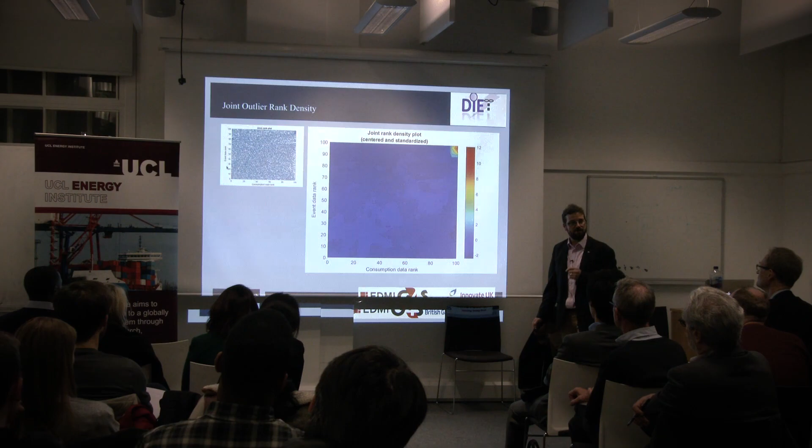You'll see this was 44,000 meters, of which we found 560 in this peak with a deviation from the background of more than 2 standard deviations.

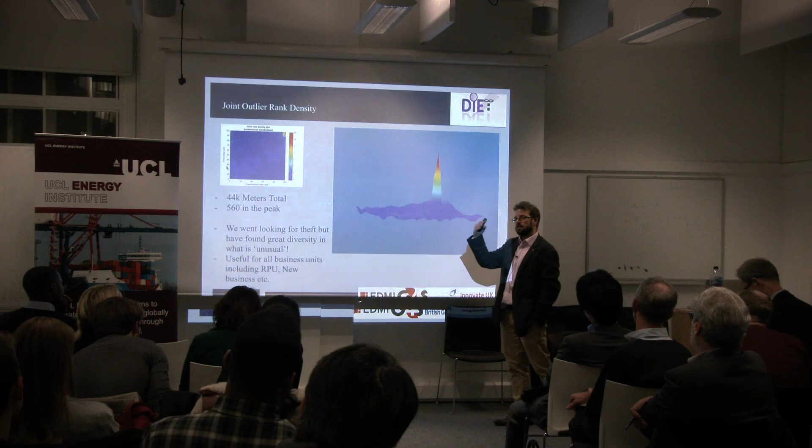Now, I have to say that we went looking for theft. What we've actually done, and we've had a lot of conversations with British Gas recently about this, is we've found a tool for detecting anomalies. Anomalies can be a whole host of different things. It doesn't have to be just theft. It might be meter behavioural problems, so the meter's gone wrong. It may be customer anomalies.

From that point of view, when we did this the first time, we actually passed back some of the meter point numbers to the Revenue Protection Unit, and they went to look, they did some physical visits. They said they hadn't found any theft, but they had found somebody who'd connected their gate to an electricity meter. It was the only thing that was connected to a meter point. So from the point of view of a consumption profile, they were massively anomalous.

Because the meter had no consumption, then huge spikes in consumption and drops, the meter itself used to also fire off a couple of events because of the rate of change. So that's to the business unit - that's why we've got to this scenario where we've got a meter that's just supporting that.

Another one was where basically somebody had a battery, a large piece of equipment that was poorly connected and was just firing off events, because of a massively noisy consumer that was causing large numbers of events within the meter. The profile of consumption wasn't that unusual because it was fairly constant use, but because it was poorly connected, essentially the meter tails weren't well connected, it was causing a lot of events.

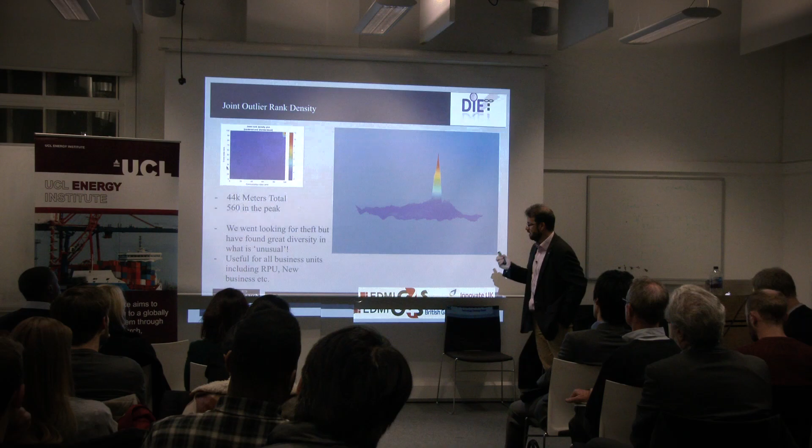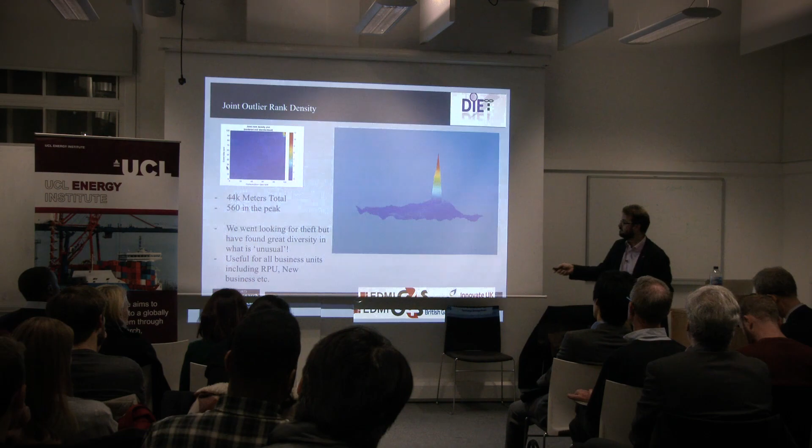So from that point of view, and this has actually now been patented, the joint outlier mechanism here, we're going to look at extending this story out beyond where we are now to actually look at anomalies in streaming information - creating new algorithms to cater for different and hitherto not well utilised data sources, and that's certainly the event data. So just to finish up, we've got this linking here.

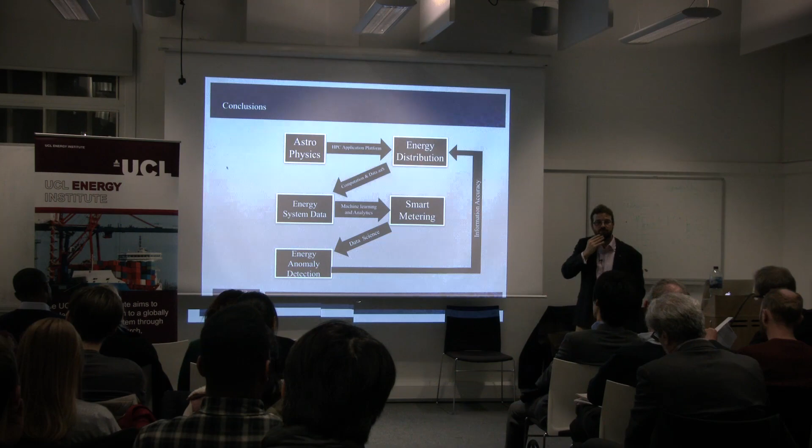That actually one of the crucial parts here is going to be information accuracy. From that point of view, really being able to highlight where there is poor quality information ending up within this stream is going to be more and more important the more we want to use the information for use cases above and beyond where it was originally designed.